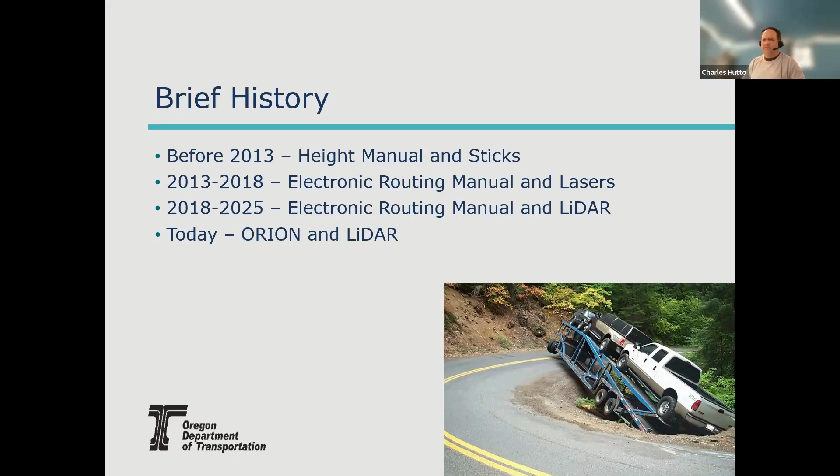I'll try to remember to talk about the pictures. All the pictures on here are Oregon-based pictures. Some of them may or may not apply to over height loads. This is just our windiest, nastiest, awesome highway to drive a car on. It has a 35-foot length restriction, and every few years somebody drives their GPS off into oblivion, like this car hauler did.

So why did we want to do lane-based routing in Oregon when we implemented Orion? The first one is we've always done it that way.

Certainly since I started in 2004, and even in decades past, we always routed to a certain lane height. So we've done it for decades and decades. And just because we had a new system, we didn't want to stop doing that. We wanted to make sure each lane under a structure had its own height, and then we could route appropriately underneath it.

The second one there, we prefer to keep the big things on the freeway, because that's where they belong. Freeways have faster traffic, wider lanes. The traveling public is used to seeing bigger things on the freeways as opposed to 2-lane highways. So we like to keep stuff on the freeways as much as possible.

We do apply a 4-inch buffer to all the heights. So we get real heights from our geometronics and our bridge unit for what the heights are. But we have an administrative rule that requires us to take 4 inches off of that height. And we almost never route into that height buffer.

We have some extremely rare situations. I can think of maybe 4 or 5 in the time I've been with ODOT where we have routed into the height buffer. So it just doesn't come up all that much, fortunately. And we almost never will route into it. We'll route them around or route the carrier another way, as opposed to encroaching into that 4-inch buffer.

The big deal for all of this is that safety is still the highest priority. Just because we got a cool new system, we don't want to start jeopardizing safety. Obviously, the motor carriers, they don't want to be hitting structures. We don't want them hitting things. That can be potentially catastrophic. So we want to make sure we don't lose any of that. So safety is still the biggest big deal in all of this.

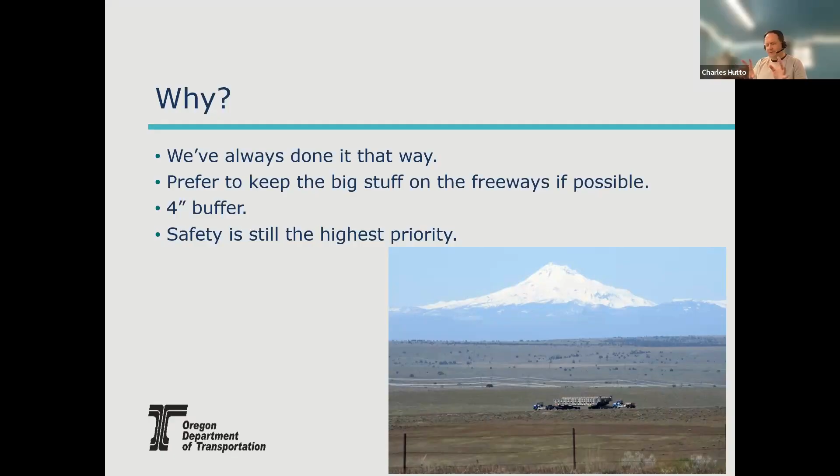The cool picture here, this is from a few years ago, a superload that we routed in Central Oregon on a 2-lane highway, and our public affairs guys, they found out we were routing this big giant thing, and so they got out there and got the cool picture with the barbed wire fence in the front, Mount Hood in the back. Just kind of a cool picture I try to put on all my PowerPoints.

So how do we get the data? As I mentioned, our geometronics unit, they collect the LiDAR data and they process it and do magical things with it that I don't quite understand. But they end up kicking out height data for us, and they hand the data off to our bridge unit, and the bridge unit, they're officially the ones that provide the vertical clearance data to us. So they review it, give it to us, we review it, and then give it to ProMiles, and then ProMiles reviews the data. And I'll stop there just to talk about all the different review processes.

Why we do that is we're still learning to trust the system. We're not quite ready yet to have geometronics collect it and then it just show up in Orion. We still prefer to have a few checks in there just to make sure everything's okay. Because especially if we lose vertical clearance, we may get asked about that from the industry, like why could I go yesterday, but today it's a lower height? And we like to be able to address those questions with what happened, maybe bad measurements, a paving project that nobody told us about, or whatever it was.

We try to avoid those things and avoid vertical clearance losses. They do happen from time to time, and we like to know about it. So that helps with the review process. Same thing if there's a great increase in vertical clearance, like it increased 1.5 feet or something, we kind of want to know what happened with it and what changed and what went on. So we like to review those things.

Anyway, getting to the last there, ProMiles, they will then add it to Orion with the 4-inch buffer, and they do it in feet and inches, is how it gets added into Orion, and it works good. And then permits are routed, and we all live happily ever after.

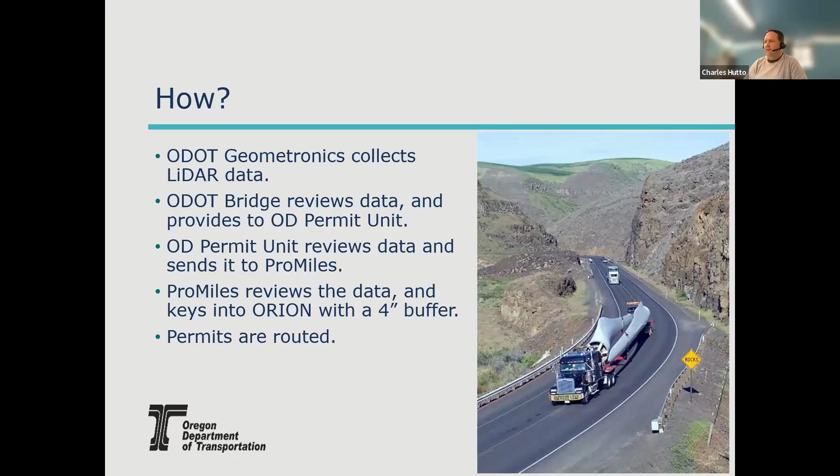This picture was from a few years ago when you could actually do 2 windmill blades on one load, and now you can't do that. They're just way too big. But this is kind of a cool picture where it's getting ready to make a left turn onto a county road there off of our state highway and go out to a windmill farm. Kind of cool.

Okay, so applying data to the system. So we provided data to ProMiles in a standard way, and there's some samples coming up here in a second. The big one that we learned a lot about was latitude and longitude. We're learning now how lat-long centric automated systems are and how the mapping and the routing and everything works. So it's very lat-long centric.

We provided a description of the structure to them, and we'll talk more about some issues we had with that when we were handing that off. We have lane clearance measurements for up to 6 main lanes. So in Oregon, I think the most we have is 4 lanes on any freeway. We built our original system for up to 6, just in case they expanded it. We didn't want to have to change our database just for new highway infrastructure. So we had it set up for up to 6, but in reality, we only had 4, and a lot of our freeways will only have the 2 lanes.

I'll say freeway a lot in this, but we do have vertical clearance for all of the state systems. So that includes 2-lane highways that sometimes have bridges or pedestrian structures over them. We also have left turn lane measurements, and then entrance lanes and exit lanes, and lots of things to keep straight because it is important to us. Where is that bridge? Is it on the main line? Is it on an exit lane? Which lane of the exit lane, if it's a 2-lane exit lane? So all that was important to us to try to get right.

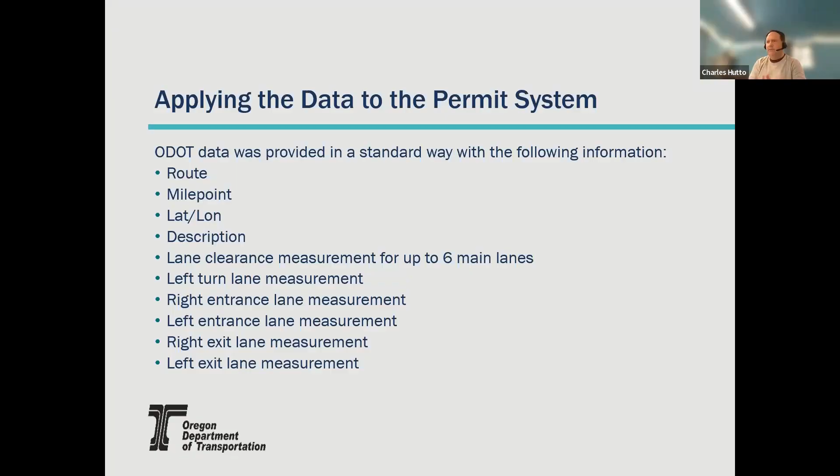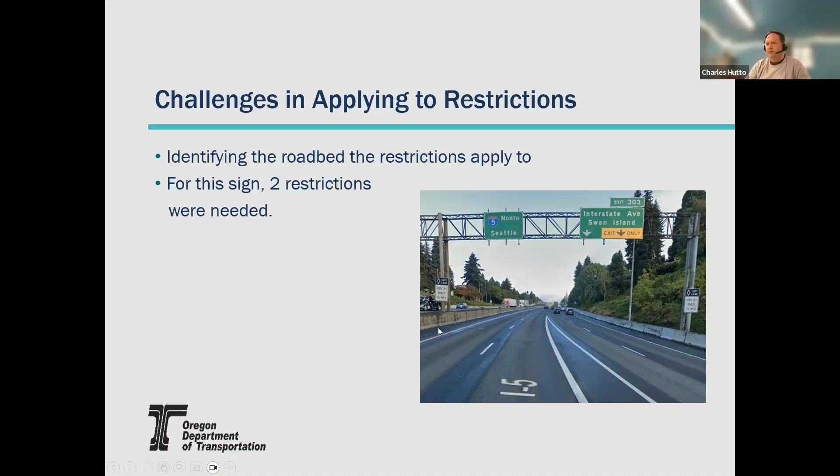So we end up with 2 restrictions on this one being needed. So this is some of the data from the back end of Orion. You can see this map on the left here, showing I-5 northbound, where they applied that restriction, and then the same sign bridge but a different restriction on the I-405 northbound main line before it merges. So that's kind of how we ended up doing that, just to make sure everything gets covered properly.

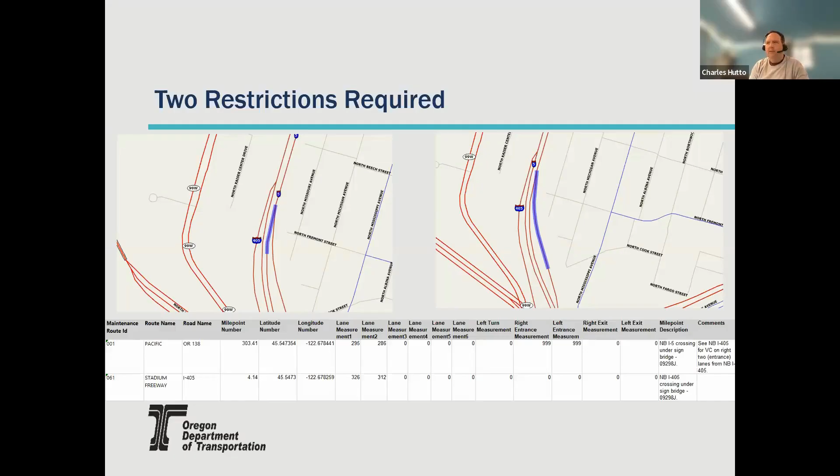Another challenge that we had is kind of, where is that structure? So if you look here on this overhead view, this is a sign bridge over, I don't know if it's entrance lanes or exit lanes, but these are on some auxiliary lanes on the outside. The 2 main through lanes on I-5 southbound are out here, but where do you put this bridge so that it shows up properly for height routing? That was a good question that we had to deal with.

So in our old system, we on the permitting side would have put this structure either where the exit lane exits from the freeway, or where the entrance lane merges with the freeway, which then would have potentially blocked the entire lane from being used if something was over height. So fortunately, with the newer technology, with automated routing and the things that we have in Orion, we now know exactly where this is, and if something were really high, it could be routed out into the main lines to get around it and not cross underneath it.

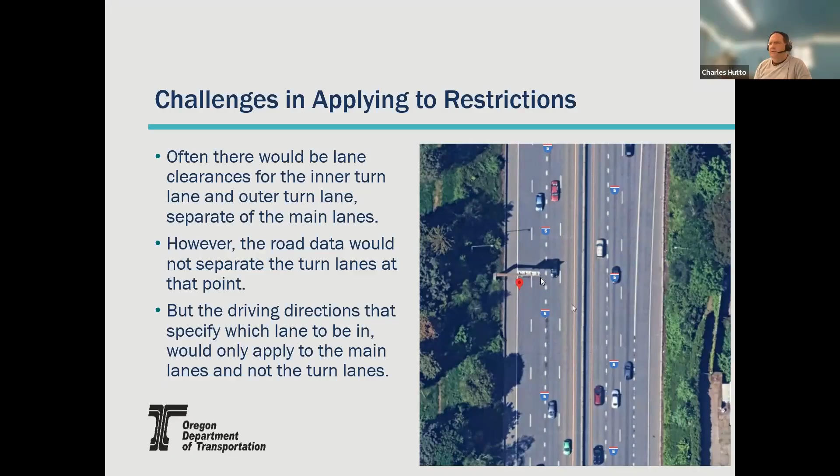Or if we had something really, really wide, over 24 feet wide or something, we would know what the height is, so that we can then work with the carrier or work with our geometronics team to get some good measurements on that, to make sure a load could fit under that structure, no problem.

Okay, another example. This is on I-205, on the east side of Portland. So 205 is an older loop that goes from south of Portland up to Vancouver, Washington, north of Portland, but it goes around the east side. And so the actual I-205 main line is below this. So there's a bridge over I-205, and then you have this tubular sign structure over the overpass over I-205. So we need to get all those measurements in there properly and make sure that we know where the structure is.

And it did get challenging at times to figure out where things are, because as we were digging deep into the database, we noticed that some things in our database, just from having multiple hands in it over decades, maybe it was keyed wrong 30 years ago when they built the thing. We had to have some of the actual background data get fixed a little bit in order to make sure that we knew where all of these things were, or confirm that a bridge was where they said it was, or maybe it was new construction, or the bridge that's showing up there isn't there anymore because they took it down last year when they reconstructed the roadway. Whatever the story is, lots of things that we learned as we went through this.

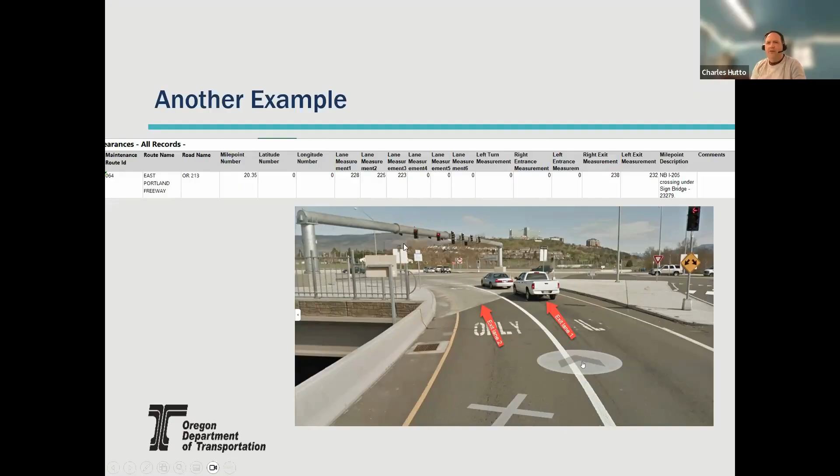So in this particular example, we have 2 exit lanes, exit lane 1, exit lane 2. They're going to end up crossing under this thing, but this right exit lane over here doesn't cross under it. So we want to make sure all that is documented properly in Orion, so that we could route over height loads appropriately.

Another challenge that we had was when the data comes over from our database for what do you call the structure? This example there is exactly what's in the database. I'll read it: bridge ID 20273 northbound I-5 connector 1WS crossing under cantilever sign, which is completely true if you know how to interpret all that.

So northbound I-5, I think that makes sense. But connector, does the traveling public know what a connector road is? Can they read the bridge ID 20273? That's on a little plaque that's bolted onto the side of the bridge. And if you're going really slow, maybe you could read it. And almost nobody outside of the Department of Transportation, I think, knows what 1WS means.

Or we all do internally, but that's a connector designation that we have from the main line. And it's complicated, but we had to interpret that or rephrase that to where it's something that customers can understand. So we make this one, for example, I don't know exactly where this is, but it would be potentially northbound I-5, exit 303, ramp to Swan Island, crossing under cantilever sign.

That makes more sense, and the motor carriers and traveling public will know where that is, as opposed to connection 1WS crossing under some sign somewhere, not knowing where that is. So, as the last bullet point says there, we had to rename some of them to clarify things and make sure that they understand what it is in the database that we're trying to get across.

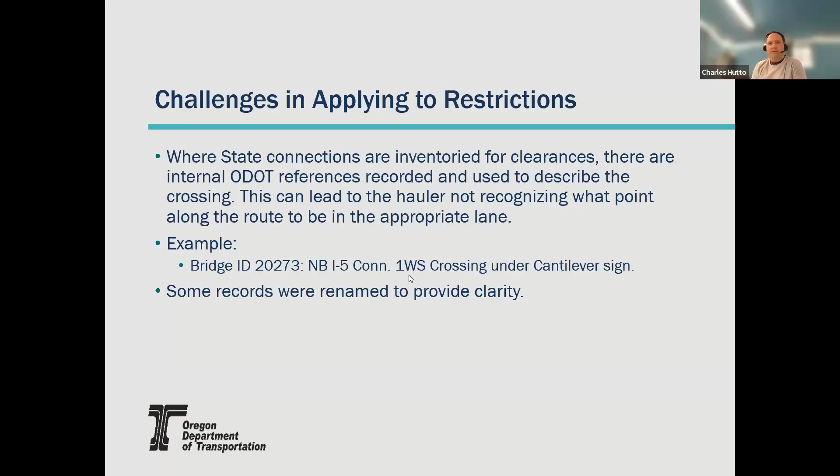And then another challenge was, I think this is the final one we have for challenges here, just the mile posting. It was definitely essential in setting these restrictions. So in Oregon, we have what I think is a very complicated mile posting system. I have no idea how other states do it, but I just know ours is really weird because we actually have two numbering systems in our state.

So we have what we call the maintenance number or the highway number, and this is a system set up in the 1930s when the transportation department was first built for designating state highways. So I-5 is Highway 1, even though I-5 wasn't in place in the 1930s. But somehow Highway number 1 is I-5, and then it goes, not sequentially, up to I think as high as 492. And there's no rhyme or reason to it. They're just kind of all over the place for what your highway number is.

Then in the 1950s and 1960s, they overlaid the route system and the shields on top of that. So I-5, US 101, I-84, whatever on top of that. So I-5, fortunately, makes sense. It starts at milepost 0 in California and goes up to 308 point something at the Washington line. It's one of the few that actually is pretty good.

US 20, for example, in our state, starts at the coast in Newport and goes out to the Idaho line out by Nyssa, and it restarts its mileposts 5 times. So there's 5 milepost 0s on US 20 in Oregon. And I don't know if other states have a similar situation, but we certainly do. So it's a little bit complicated trying to understand that.

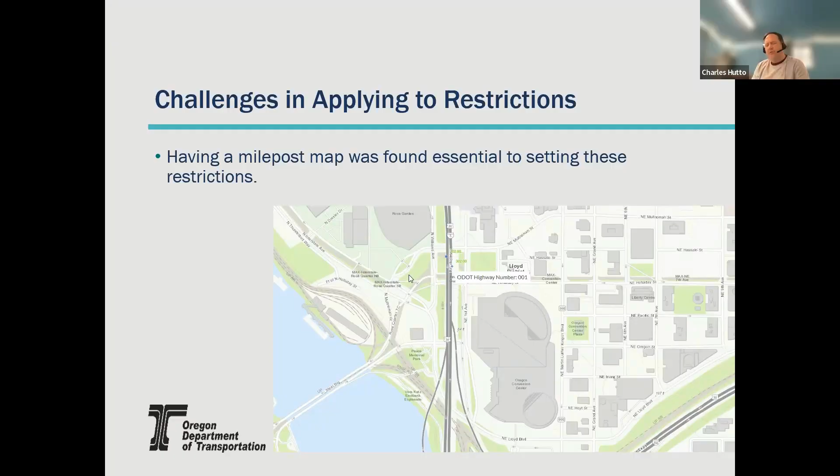It's one of the hard things I have when I'm training new staff, trying to have them understand that. And it usually takes a couple of days for it to kick in. I do remember the meeting we had with ProMiles trying to describe this whole highway numbering system that we have. And it was an interesting meeting trying to have them get it, but they got it. And once you get it, it kind of makes sense. It certainly was a challenge, but understanding it was definitely good to put in there where all the overheight clearances are.

All right, so how a truck is routed. If it's 12 feet wide or less, the truck is routed in the rightmost lane that it fits in. So we assume for freeways 12-foot wide lanes, which I think is standard. For the non-freeways, we also chose to assume a 12-foot wide lane. It's possible there are 11-foot wide lanes, but we'll get into how we've always done it this way and why we don't think that's an issue a little bit later.

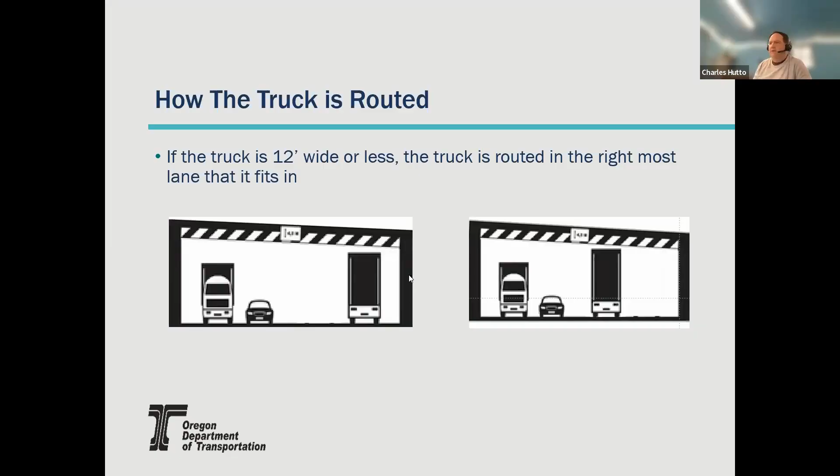But for road beds that have more than one lane, we route it into the rightmost lane that it fits because that's where the freight traffic and the big stuff should be and where the traveling public expects it to be, as far right as practical. If it's more than 12 feet wide, it's routed into the rightmost 2 adjacent lanes that it fits in. So if it's a place where there are 3 or 4 lanes and it can't stay in the far right lane, for example, Orion will put in their instructions to use the center lane and the left lane to cross under that structure.

Don't use the right lane. So, or if it's the left lane they can't be in, it'll instruct them to use the right lane and the center lane to cross under that thing. So we're telling them where to be as opposed to where not to be. And this only works if you have 3 or 4 lanes in there. And we'll talk about an example here in a bit of what happens when you only have 2 lanes on your freeway and you have a height restriction there.

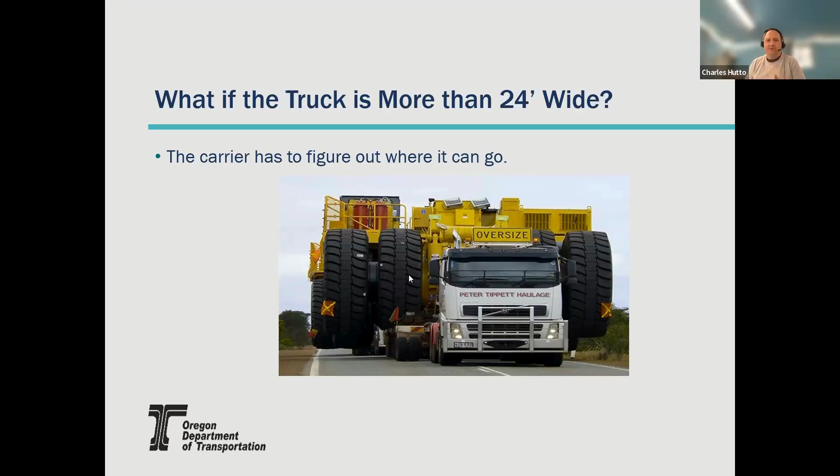And then for more than 24 foot wide, that gets way into the super loads, and the carrier has to do some work to help us make sure they can fit under those things. There's usually route surveys and a lot of other things involved when they get that big. So we'll definitely help them with it. We have the heights, we have the LiDAR data if we had to go look at original data to help determine if something big could actually make it. But the carrier has some additional work to do. Fortunately, not too much stuff is more than 24 feet wide that we have to route, which is good.

Okay, so just kind of summarizing the pros and the cons of it. So our pros, the main one, as I mentioned earlier, is to keep the bigger stuff on the freeway. It decreases travel time and expense for the carrier to keep them on the freeway if we can, instead of having to detour them off onto secondary roads. There's always, by definition on a freeway, at least 2 through lanes of travel. So that's more room for regular traffic to pass the big giant loads that are going.

It took them like 3 or 4 nights to get to the southern part of the state. They got there and they got the transformer delivered and everything, so that was good. But just an example, if it could have fit, which it didn't, it could have stayed on I-5. It might have been a 1 day or a 2 day move instead of multiple nights trying to go down 2-lane highways.

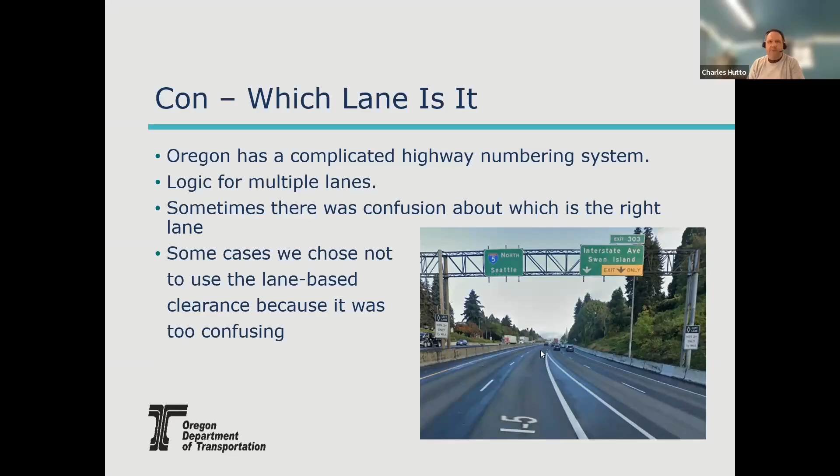One of the cons, and I have this in quotes here because it's sort of a con, sort of not a con, is the 12-foot wide lane. So before Orion went live, we did not consider lane width. All we considered was the height. So we didn't care if it was a 10-foot wide load, a 12-foot wide load, an 18-foot wide load. If the height worked for the lane, we would route underneath it, just use right lane or use left lane or whatever.

Orion now, if the load is more than 12 feet wide on a 2-lane highway, it will consider both lanes. And if it won't fit in both lanes, it will then detour or route around or give a route failure if it can't find another route. So this is kind of one of our bigger ones that we've had to deal with.

This is the West Emigrant interchange out in Eastern Oregon on I-84. So in years past, we would just use right lane under West Emigrant exit 234, and it would be no problem. With Orion, it would then start routing them onto the detour route, or still does actually today. The detour route is about a 5 mile detour on an old frontage road. It goes through a small little town in Eastern Oregon, and also past a state park. So it is what it is.

This summer, that detour route was closed for several months because they were replacing a bridge on it that was built in like the 1930s. So an old bridge, they replaced it. The main detour for this didn't exist. So the secondary detour route was 400 miles on 2-lane highways to avoid this. Or can we find a way to keep them on the freeway? That was the question we were asked.

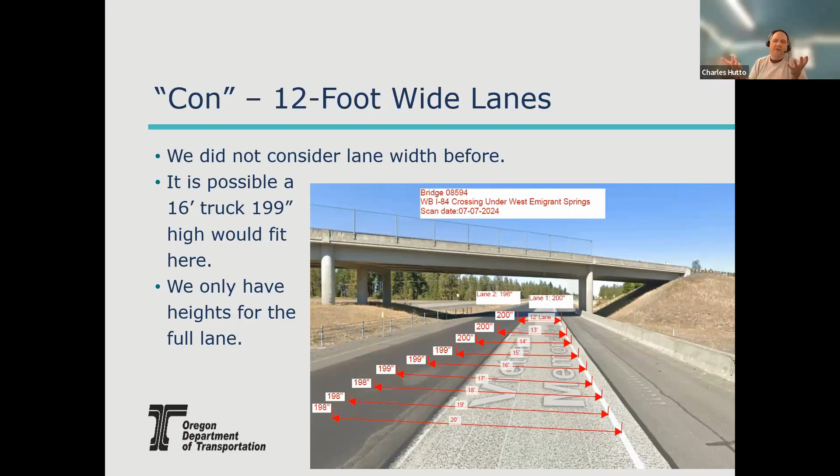Our staff are reviewing them, and our maximum auto issuance threshold is 15 feet 0 inches. So anything higher than that, our staff has to review anyway. So we're looking at those regardless. So how much do we use it? We have just under a couple thousand restrictions that have the lane-based routing.

And as of yesterday, only 222 permits have been issued with lane-based clearances. It may seem a little bit low, and as I was looking at this, it does seem a little bit low. But one thing I remembered is when a structure has what we in Oregon call an up and over, where you could take the exit, proceed through a traffic control device, and then get back on the freeway, as opposed to crossing under the structure on the main line.

Orion will do that. It'll just kick them over to take the up and over, and that's what the carriers expect. That's what we expect, and it works just fine. So that may be why we don't see as much lane-based clearance for those few structures we have. They just take the up and over. So, but it does work. It works great, and we really like it.

And if you get it right, I want to say 15.9 or 15.10 at the routed height, not the real height but the buffered height, you have to zigzag through on I-405. So you use right lane, use left lane, use center lane, and that's how we've always done it. And it has worked, and we've routed stuff that way for decades. But it was just really difficult to get that programmed into Orion properly.

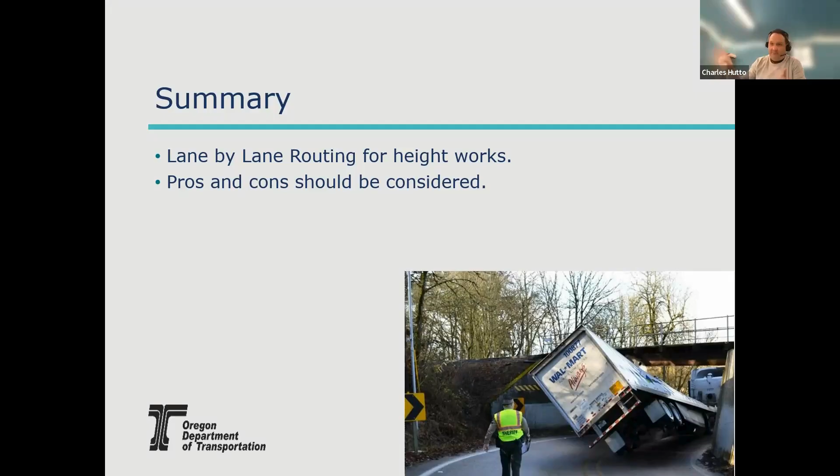I think there's a Facebook site that you can follow, and they've got a camera up on there now. They can just watch all the magic happen. So anyway, just something we obviously don't want to have happen for real, and have it be a permitting issue on our side.